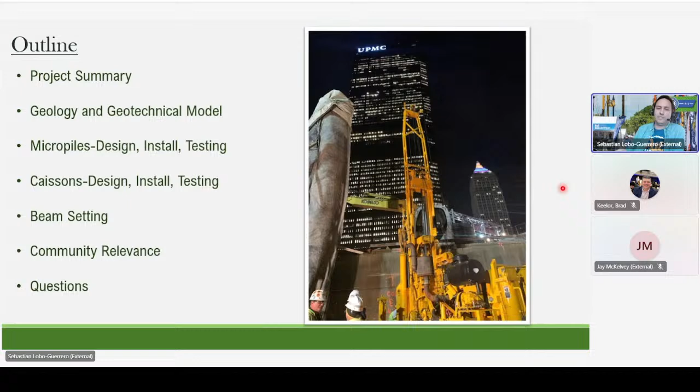This project extended through a big number of years. The community relevance — I have to say, from an ignorant point of view, I never really understood it at the beginning, and I was just treating it as any other engineering job. It's probably the coolest project I have done from that aspect. Obviously, if we have time, we can resolve some questions at the end.

To get started, the name SEA CAP comes from the Sport and Exhibition Authority, SEA CAP, but it has a lot of agencies also involved. The problem really starts in the 50s when they built infrastructure like the interstate highways, and basically divided downtowns. Pittsburgh is not the only case — that's the one we're focusing on today, but this has been repeated elsewhere.

We've also been working on the cap for Philadelphia, currently under construction. But this story is true of every downtown: you have the highway passing through the middle of the city. At that time, the priority was just to connect and transport, but you end up having this open wound in the middle of downtown, isolating sectors of the city. That happened with Interstate 579 and the Crosstown Boulevard, and the idea is to connect the city back, to bring the different sectors back together.

The project is a 3-acre public park with pedestrian and bicycle routes. The idea is that it's going to sit at the top of the highway and be completely camouflaged. There are many stakeholders involved: the Pennsylvania Department of Transportation, because that's the highway underneath, the Sports and Exhibition Authority, and the Pittsburgh Penguins, who own the facility next to it, the PPG Arena. This is really envisioned for the Pittsburgh culture of enjoying games, having a space where before entering the stadium you can gather, watch games, and celebrate.

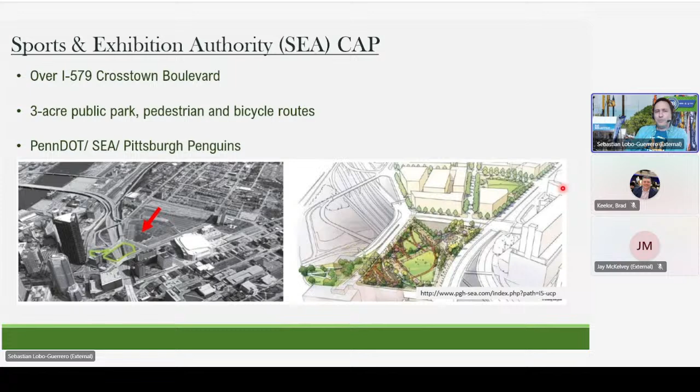This concept really started decades ago, thanks to a lot of politicians too. I don't always talk good about politicians, but in this project, definitely I will, because it was thanks to their vision that this became a reality.

The construction cost was about $32 million. It takes a big team to do something like this. Fay was the general contractor, McCrossin did the drill shafts, Amelie did the micropiles. You also have the City of Pittsburgh as a partner, PennDOT, and HDR was the prime, serving as the structural designer, under whom we worked. For foundations, FTG, Foundation Testing Group, helped us a lot with the testing.

The geology of Uptown Pittsburgh, simplified for time: in general, in downtown Pittsburgh you have some fill placed over the years, about 5 to 20 feet of soil, then about 20 feet of claystone. In general in Pittsburgh we have red beds, shale, and materials that are basically clay that has consolidated into rock, but it's extremely weak and weathers down very easily. It's always a challenge because you don't want to put all your load into this. For spread footings with low bearing capacity it may work, but for something requiring higher capacity, you have to bypass that.

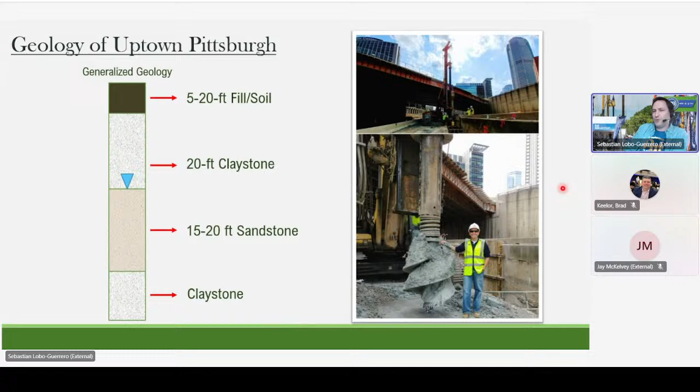Then you go into 15 to 20 feet of sandstone, a much better layer, but the problem is you go back into another claystone below. So it's always the trick of having this sandwich of good sandstone between two bad claystones and trying to put all your foundation in that. The picture on the right is during the excavation of the drill shafts, showing the kind of equipment we used. I know this is hard to follow, but I have to follow it.

This is a plan and cross-section, an elevation view of the bridge. It's not the biggest bridge you've seen, and this probably won't be that impressive - it has about 3 spans. The first span is about 55 feet, the second is 92, the third is about 91. It may not be the longest, but I can almost guarantee it's the widest you've seen in your life. It's also extremely complicated because you have the piers in the middle of all these highway lanes, making it very difficult to construct.

For the piers, the selection was drill shafts because it minimized the disturbance and doesn't require a pile cap.

For the abutments, we try to avoid interfering with the existing retaining walls, which have been there for decades. One of the priorities that PennDOT had was that they did not want any interference. So on the abutments, we have to put vertical loads on vertical piles, but for the lateral loads, we end up using micropiles battered backwards.

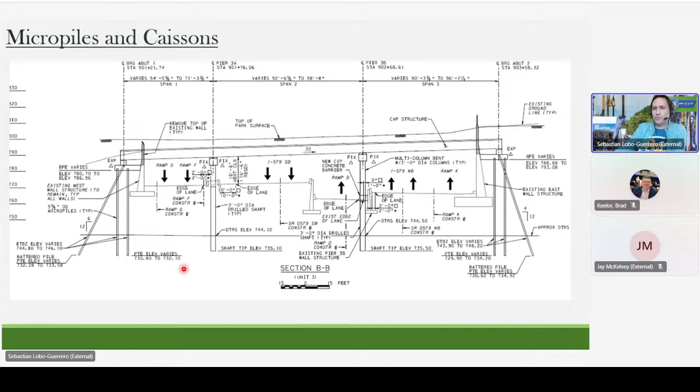This is kind of a new concept, something not used that often, because typically for lateral piles, you want to put battered piles towards the front - that's how you resist lateral forces. But in this case, we did not have the luxury of that because we would damage the existing structures. So all the design really was based on accommodating the surrounding conditions and trying to make these battered micropiles work. That's basically the principle of what we had.

Now showing the different parts and elements, the 42 caissons are basically allocated in 2 piers - you can see it here on the left. They are single caissons that come up and merge into a cap at the pier. Then the micropiles, as I said, this is one of the abutments - the other abutment is to the left, and they are battered backwards. So 42 caissons to 220 micropiles, all in the middle of the city, trying to make it work while keeping the highway completely open.

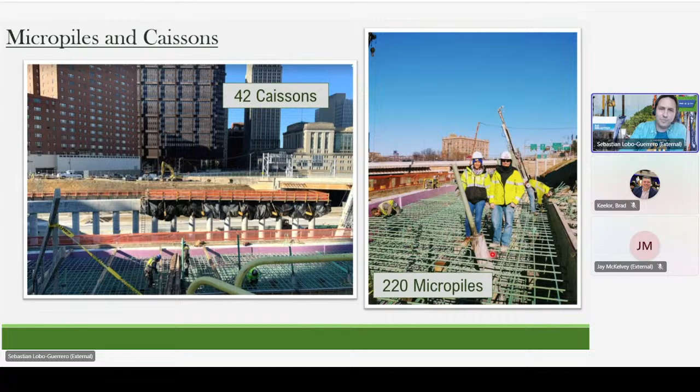The micropile design - I'm not going to spend too much time here. Micropiles are basic design by now. We have complete methodologies covered in DM4 and AASHTO.

Basically what we are doing is taking the perimeter of your hole times the bond times the length, and that gives you your resistance. All this comes from tables. I always say, after using micropiles for so many years, we can design this based even on the color of the rock, because you just get an idea of the material, what is the bond, but then you're going to test all these to make sure your resistance was appropriate.

Some peculiar thing on this project is that the design load we used was 432 kips. To my understanding, that's the highest used in the city of Pittsburgh for a transportation project. But what is more impressive is the load we took during the test. That's just the principle of the micropiles.

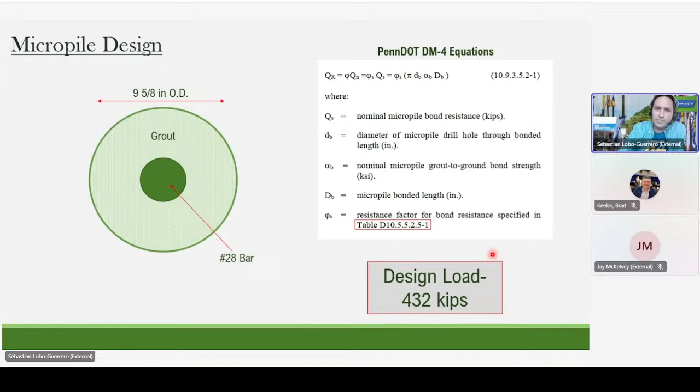On the left, you have the test that we took to the highest resistance. For everyone that has seen me before and knows about me, I'm a big fan of selfies. I'm very proud of what we do, sharing what we do. So I could not avoid having that picture, celebrating the result of the test. Obviously, this has to be done after the test is done - you don't want to climb the frame and the beam while the test is being done.

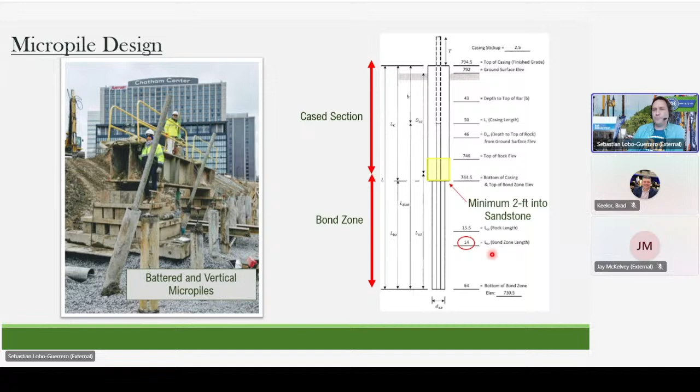On the right, we see one of the details on the micropiles. The length of the bond was 14 feet - traditionally a standard value, not extremely long. The reason it's 14, an odd number, is because we were trying to minimize being on that sandstone layer in the middle and not punching into the underlying clay. So it's tricky because you want enough elements - obviously you tend to make longer elements to reduce the number of elements, but in this case you couldn't, because you would be punching below. That was pretty much the principle.

All kinds of group effects have to be analyzed, basically going back into the AASHTO FHWA principles. We have these loads, and we have to take the loads and project them from the pile group and make sure we are not punching into the layer below. So obviously group effects have to be considered. This is something typically done in downtown Pittsburgh because of these alternating clay layers.

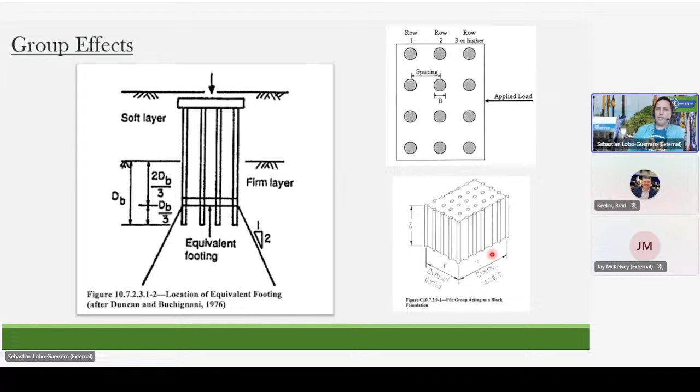The micropile installation is relatively simple. The technologies we see in Pittsburgh are the same as we see in the rest of the country - we have the casing go down, and you're drilling through.

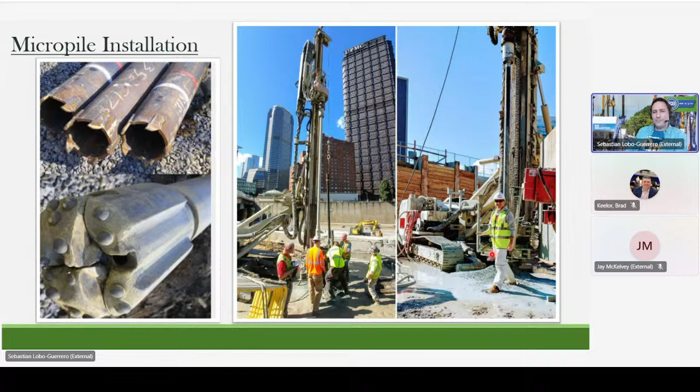I'm a big fan of always taking a picture with the first foundation element. So what you see there on the left is me in a bunch of grout, just celebrating that we were able to install the first micropile for the project.

Then we go into the micropile testing. Not every element is tested. We have verification tests, about 5% of the production ones, and a good number of verifications starting on each substructure. We have tension and compression testing, verification and proof.

Part of what Taylor always gives me grief about is that I took the first picture in September 2019, 5 years ago, extremely excited about this test. It was sunny and nice. Then she ended up covering the ones during the winter, so she always said, why do you always go when it's sunny and nice, and I have to go for the ones that are muddy and rainy?

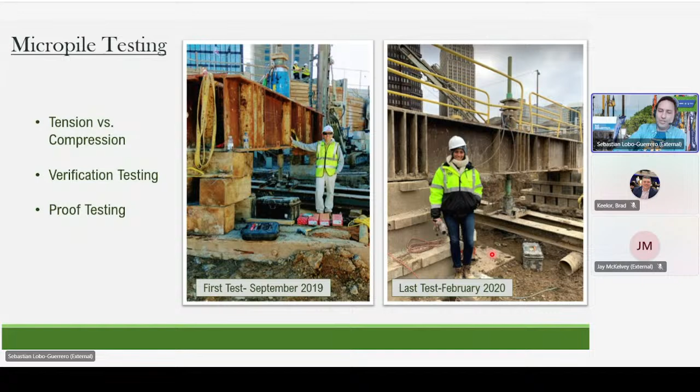The micropile verification test is a standard test, not really much to talk about. The thing I really like to show here is that we took this element to 200% of the unfactored load, which is 576 kips, 2 verifications per abutment. I like to reflect on that number because 576 kips is a lot of load for anything that's called micro.

That shows the resistance we have in the city of Pittsburgh and how good this sandstone could be. So, as far as I know, this is the record for micropile for DOT in the city itself. It was successful. We did not have any effects of creep or any signs of distress or failure.

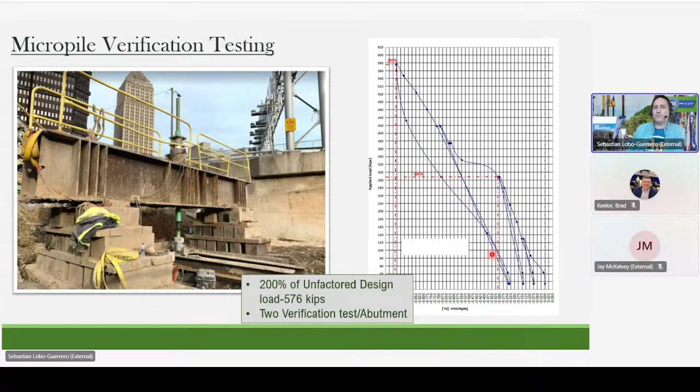The criteria, not going to bore you with all these, but just quickly: maximum plastic deflection of 1/2 inch. What's important on these micropiles is not the total deformation, but the total, and then you subtract the elastic to see what is the interface deformation. You don't want to exceed 1/2 inch because that's when you go from peak to residual. So that's the first criteria.

The second one is in the first 10 minutes, you have to have less than 0.04 inches. You don't want any creep effects. And if you do an elongated test, then you do 0.08 and 60. You want to make sure that you don't pull out to failure.

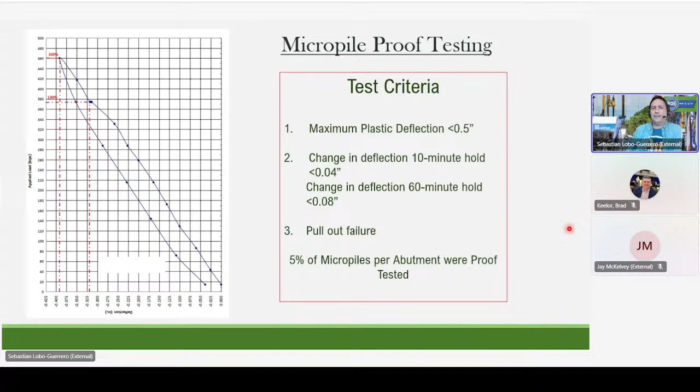5% of the micropiles, as I mentioned before, on the proof were tested. We review every single one of those logs. That's something the city of Pittsburgh and PennDOT are extremely strict on. When you're working in these kinds of conditions, with the implications for all the structures around it, quality control and quality assurance is extremely important. They want the design team involved during construction to make sure everything is accordant. That was something very enjoyable on the project.

I think it's important to work together with contractors. The caissons for the piers were designed at 42 inches or 36 inches, believe it or not. The reason we have 36 inches is because literally we did not have enough space. I have never done a drill shaft just because of a space requirement being so tight. Keep in mind, this is still with the lanes open, so utilities and all kinds of things.

The casing, they have temporary casing in the soil. Once you go into the claystone, the first claystone, you don't have to have the casing. The claystone is competent enough. Obviously, that's what I'm telling you now, but when you are doing contracts in the city of Pittsburgh, you have to be careful and recognize there may be a need for temporary casing on that top claystone. In this project, fortunately for the contractor, it was not needed, so it simplified the process.

And we were going 9 feet into rock. You may ask, why 9, why not 10, another rounder number? It was just to avoid punching into the underlying layer. It's very unique, I think I've never done a project with 9 and not rounded to 10, but that's what it was. On the right side, you're seeing the first drill shaft installed in the project, or the first 2 that were installed.

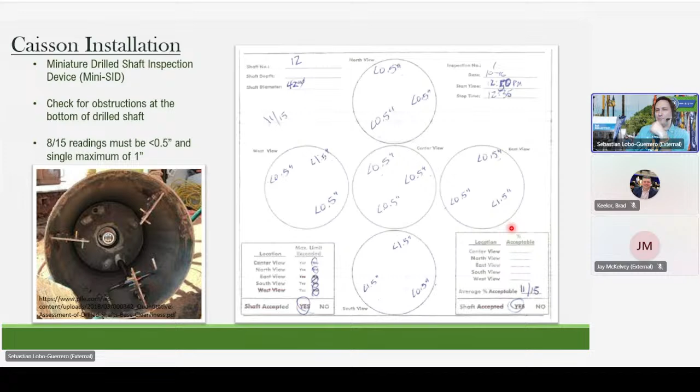In this case, we were going this strict even though we did not account for end bearing. We designed them only on side friction. It's debatable if you can - if you've seen my presentations on drill shafts and the state of the art, I like to combine side friction and end bearing. In this case, because we have that claystone below, I definitely wanted to stay away from that, and only depend on side friction to minimize the potential for punching. So even though we didn't need this strict criteria on the end bearing, we still wanted to keep it just to make sure construction was done properly.

After everything was done, the shaft was installed. We did CSL testing - I'm sure most people are familiar, but just a quick summary. You put a sensor on one, you send the wave to two. You basically lower the two sensors on the access pipes.

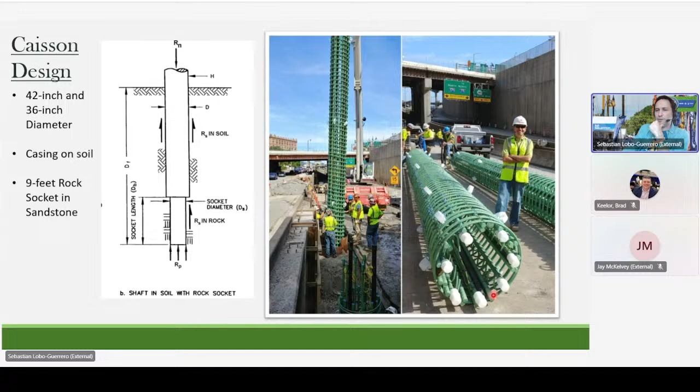Let me just go back a second - these are the access pipes, what you look at here. So you lower them and you measure the waves. You measure compressive wave, you look at the time that it takes. You can calculate velocity, but in reality what you really want to see is if there's a drop in velocity or an increase in time, because that will be a sign of an anomaly or a defect.

So we did CSL standard - this is all on PennDOT requirements. At the time I guess we were doing a transition. These days you are required to do TIP, and if you have problems then you do CSL. This actually was a pioneer project on that, one of the first ones that utilized this methodology. So we only did CSL on the ones that reported anomalies or problems with TIP.

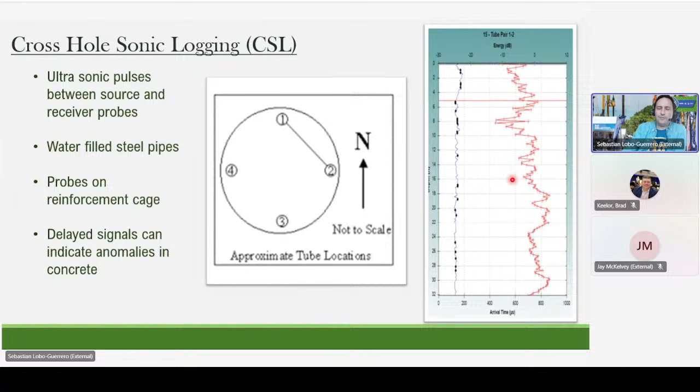The regular construction, you put water on the pipes as you constructed. Once you finish, then you put the sensors and basically do what you see on the right. We also did TIP. In this particular project, TIP was considered as the main tool to determine if the elements were competent or not. It's temperature monitoring for those that are not familiar.

The last thing I want to talk about right now is a second integration of Laplace's differential equation for energy, but I'm sure we all at some point in our careers came across that. That's the way we solve flow of water in soil - that's the flow nets we did when we were studying and all that. TIP is pretty much the same, except what you're doing is flow of heat. If you don't want to solve the double differential equation, just look at it as a correlation.

If I know the volume of concrete that I have, I can say I know how much heat has to generate. So if I put sensors around my shaft and I see the temperature, I can correlate and see if it's adequate or not. Look at it also this way - if I know the temperature, I can back-calculate and see how much concrete I have. I can create what is called an equivalent radius, which is not a physical radius, but is an equivalent radius of how much concrete you have.

If that equivalent radius is bigger than the physical radius, that means it's good. You put more cement, or you actually end up doing a bigger caisson. When it's less, that's called necking, and that's when you have issues. It could be because the hole collapsed, but most of the time it's not. The actual hole stayed as drilled, but it's just that the quality of the cement or concrete is lower than you thought.

That's what is called TIP, the standard these days on PennDOT. TIP is done for every drill shaft, and if you have anomalies, then you go and do a CSL. In this case, we did have anomalies with TIP, and towards the bottom we saw a significant reduction in heat.

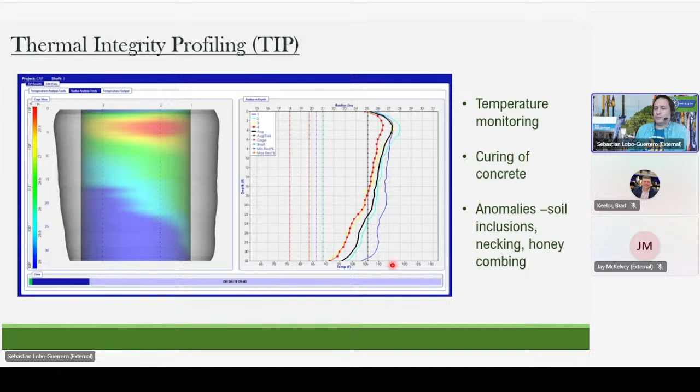Because of that, we had to go and drill into some of the drill shafts we had. This effect was not observed on every single shaft, just a few isolated ones, but it was enough to generate some concern. The TIP was showing concern, but CSL was not showing that much concern. So the only right answer was to go and drill a core and find out.

You can see by the smile on my face and Taylor's face that we ended up coring through, and we got absolutely good concrete. We tested it, and it satisfied the unconfined compression requirements for the project. So it was concluded that it was not an issue, but it taught me a big lesson about TIP tests.

In Pittsburgh downtown, that unit — the sandstone — definitely has an exchange of heat that's a little different than in other areas, and your TIP results may be biased a little because of that.

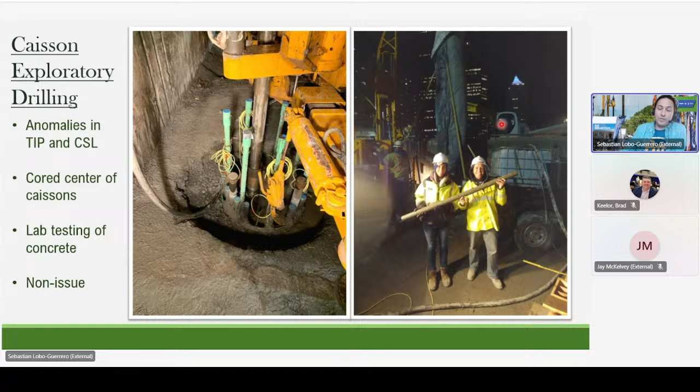The important part is not to panic, just keep it in mind and adjust. And if necessary, nothing beats this: I'm a very simple person with very simple beliefs — I think engineering has to be done by... geotech engineering is an art more than anything else, and it's important to be comfortable with what you're doing. If something doesn't match, try to look for ways around it to prove it or find the problem. This was very successful, and it was used to confirm that the shafts were good.

Not often will you see somebody showing pictures of their mother during a presentation. So that's my mom, for everyone who hasn't met her yet.

I'm a big fan of mixing life and work and everything. I think by now it's not a secret for anyone. I truly believe it's important to enjoy what we do. I believe geotechnical and civil engineering as a profession is something extremely prestigious. I grew up in Colombia going to job sites with my dad, who was a contractor. Until about the age of 10, I didn't even realize there were other jobs besides civil engineering. After that, I didn't realize people weren't crazy about being civil engineers — they actually like other things. But anyway, I look at civil and geotech engineering as something very, very prestigious.

It's my life. It's what brought me to Pittsburgh. I would not have come to Pittsburgh, I would not be talking to you today about a conference in Pittsburgh, if it weren't because geotech engineering brought me here. I share that with family, with friends, obviously coworkers, and I celebrate that. So I know this is going to sound crazy, but I do take family to construction sites, with the proper precautions, right?

And following OSHA requirements. But I love to share what I do, and the same goes for sharing all this on LinkedIn and Facebook and things like that. So, that's what it is.

So I took my mom there to show her. She was visiting from Colombia, and you can see her face, a lot of concern. I got worried she was concerned something was wrong, but apparently it was just because of the heights. This was abutment 2, with the micropiles, and it was a drop there.

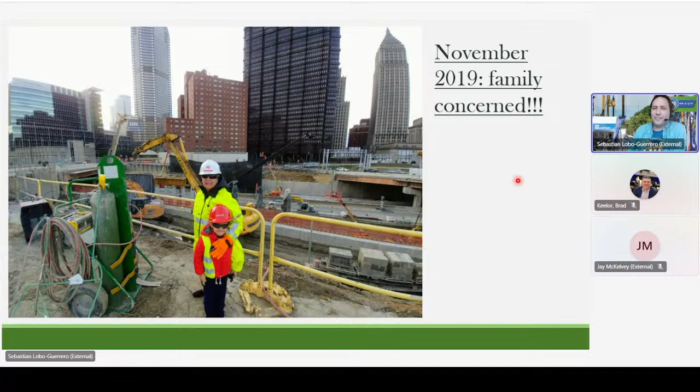And then obviously COVID came along between these two slides. I don't want to sound insensitive, COVID had a lot of negative things, but it also had some positive things.

For this project, it helped a lot on the construction time because of not having that much traffic on the highway, it gave a lot of freedom to do processes a little faster.

All the drill shafts were completely constructed. You can see them behind me. Micropiles are installed. And at that point, we start placing the beams, which sounds like a small operation, but it's something extremely important.

It sounds like a short-term activity, but it's not when you're putting this across the entire cap. You're covering a significant part of downtown with these beams placed on the foundation.

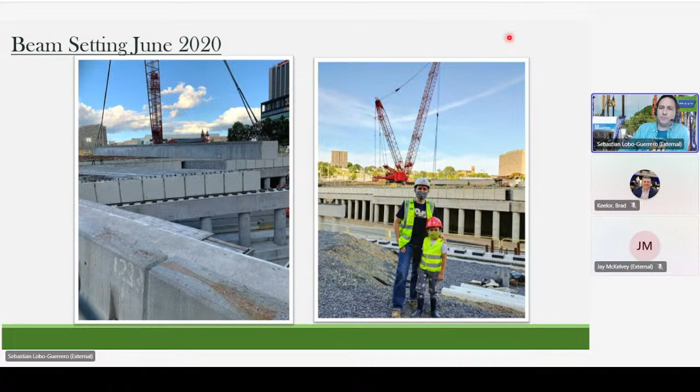So keep in mind the timeline because it's interesting. We started fall 2019. By June, we already have these beams going in. Then it took almost a year of putting those beams in before starting construction.

And this part of the presentation is when everything changes to me as an engineer on this project. Up to this point, I was looking at this as just another regular project. This is what we've been doing forever - we design these things, go to construction, and it's done. And that's when I really start understanding the relevance of this project and why it was so unique.

A whole year passed since we posed this, and in your opinion maybe not much is done, but it's a ton. You're constructing a park. You have to bring soil, create little mountains, create little ditches and channels. This is not just a bridge. This is not what we always do - finish, pave, open it to the public, and that's it.

So by August 2021, I know we all managed the pandemic probably a little differently. I was bored to hell. I was doing a lot of virtual presentations and visiting my projects, but not much after that. So we came up with the idea of renting a helicopter.

Believe it or not, renting a helicopter is cheaper than what you imagine. You can Google it, and I'm sure you'll have some local helicopter in your region you can rent and go around. What I wanted to do was visit a few projects from the air.

My hope was to take some amazing pictures. So I went with my wife and my son - you can see them here. And then we approached the city of Pittsburgh from the air.

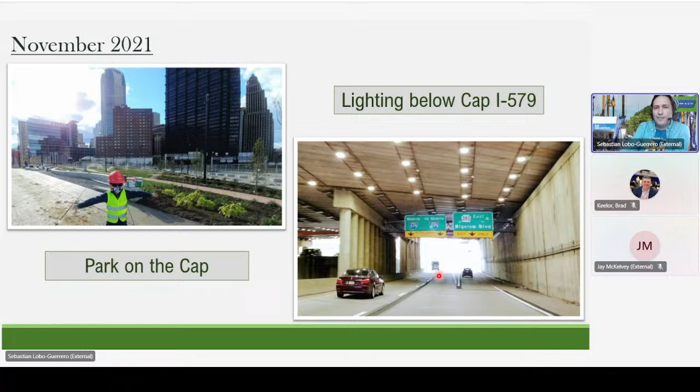So by November 2021, I feel the project was changing. I mean, it was completed, but I started seeing something that I never thought was gonna be that cool, which is that it started bringing the community together, from all levels.

So on November 2021, we have the official opening with the Pennsylvania governor, Mr. Wolf, who is here. And I told him my last name is Lobo-Guerrero, which in Spanish is Wolf Warrior. So I said we're almost cousins from different continents. He did not find that funny. But anyway, so he came here, we took the picture, and he was the one opening it.

You have the mayor, Bill Peduto, the mayor at that time. We have people from our company, KP Chopra, who is the owner. Taylor worked very hard on this. And Roger Eaton from HDR, he was the project manager.

And to me it was very interesting because I started seeing this, what you see on the right. It was a lot of media and a lot of people coming to this, and I'm not used to that. Most of the projects we work on, we finish and people use them, but we don't have something like this. So I started seeing that this was meaning something for the city of Pittsburgh, that it was not just one bridge that we did, that the community really was going to start enjoying it.

So, at the same time, November 2021, we started receiving a lot of invitations from different organizations and different events. I started traveling and presenting this project and sharing the idea. And it was really exciting to see how many people were interested from different cities, and that this was something we could also use in our city.

And this was, as I said, we ended up doing the Philly Cap. As far as I know, there are plenty of caps being right now designed and constructed in the US. I also got some invitations from abroad because they also saw it as a very good idea to have. So I've been to different countries, Mexico and Costa Rica, doing similar ideas and similar concepts. Then things really start taking off in February 2022.

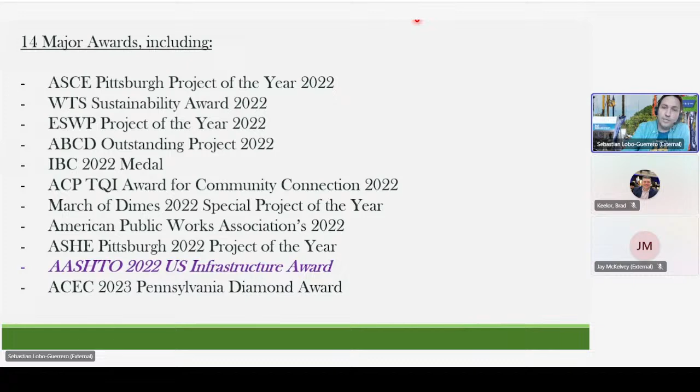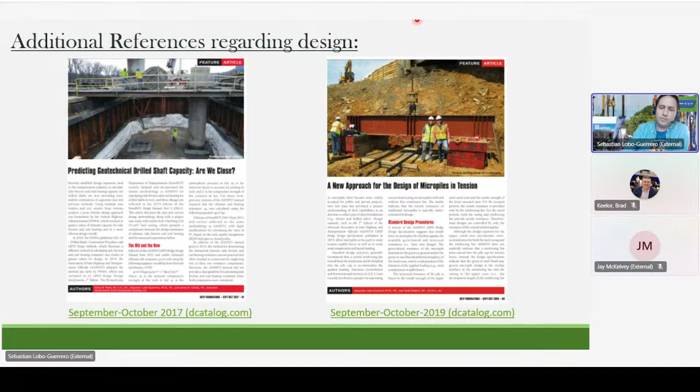So we have articles about this and different aspects. If anyone is interested, let's connect on LinkedIn - that's the easy way to share information and pass links. If you like, look me up on YouTube - I don't have a channel, but we have a lot of presentations, things also with Geo-Institute and with Brad that we've put through the years. Always available and ready to share what I know. So that's all I have - I don't know if we have time for a few questions.

Well, thank you, Sebastian, for a wonderful presentation. A couple questions for you.

I was curious, did you use the PennDOT design criteria for the design of the shafts and micropiles? Yeah, that's a good question. Everything was done in accordance with PennDOT DM4 - obviously in Pittsburgh, that's the code we use. However, we did need some exceptions because typically the drill shafts and all that part was a standard design based on AASHTO section 10, so it's all specified there. The fact that we were not using embedment made it a little conservative, so that was simple. But we had to account for group effects that sometimes aren't that clear in some of the manuals, so we ended up expanding a lot into that.

But the biggest thing we had was the micropile being battered backwards - let me go back and explain that, let me just take my pencil. When you have a lateral force, what you want to do is batter your element. If I push this way, the axial resistance multiplied by the sine of that angle gives me my lateral resistance. That's why on a regular bridge or abutment or foundation, you batter in the direction that gives you the maximum resistance coming back to you. In this case we couldn't do that because of these walls from PennDOT - it was very clear we could not interfere with the walls, which is complicated when you have walls that have been there 70 years and you're trying to do foundations around them. So the way we did it was we put the micropiles in backwards.